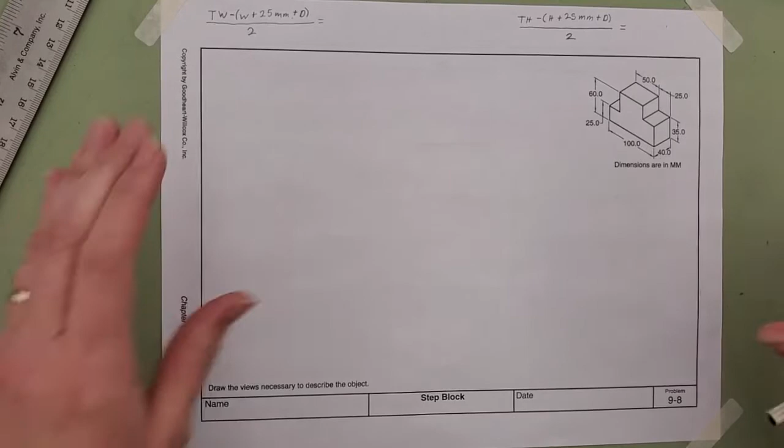So this side of the paper, 9-8, is a little bit different because this has metric measurements. So we can't use our regular scale. We need to use a ruler that has centimeters and millimeters on it.

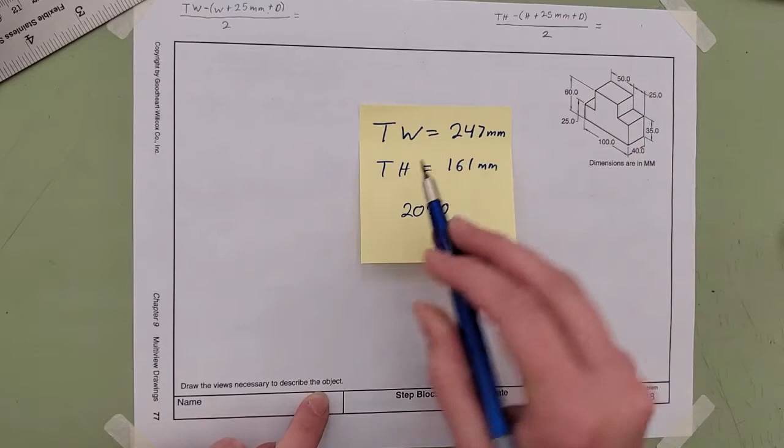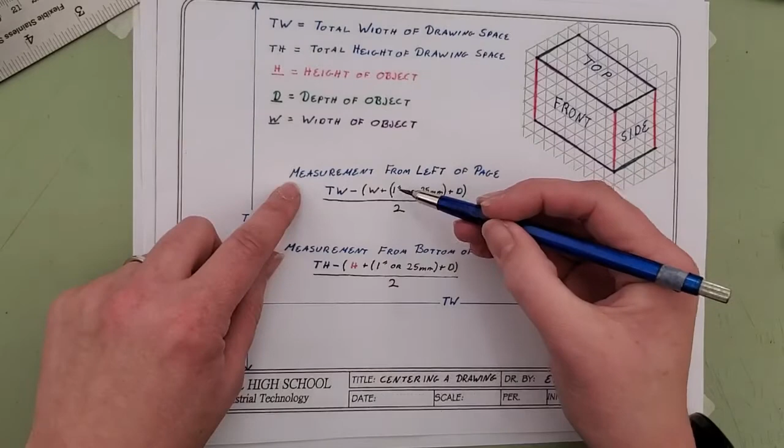So I went over and measured the dimensions from the leftmost border to the rightmost border. My total width is 247 millimeters. From the top of the title block to the top of the drawing space has a total height of 161 millimeters. It's kind of helpful that these two are odd numbers because when we're using metric, instead of 1 inch of space in between, we're going to use 25 millimeters, which is essentially the metric equivalent of 1 inch.

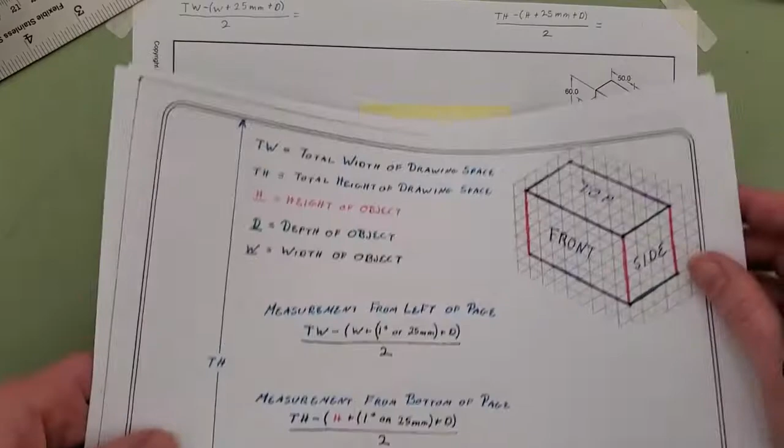Okay, now most of the time when I do my math to figure out where things go, I go ahead and put it on the top portion of my paper. I'm not really grading this for you guys, it just kind of helps me to see where you got a little bit lost. The part that I'm really grading is right here in the middle.

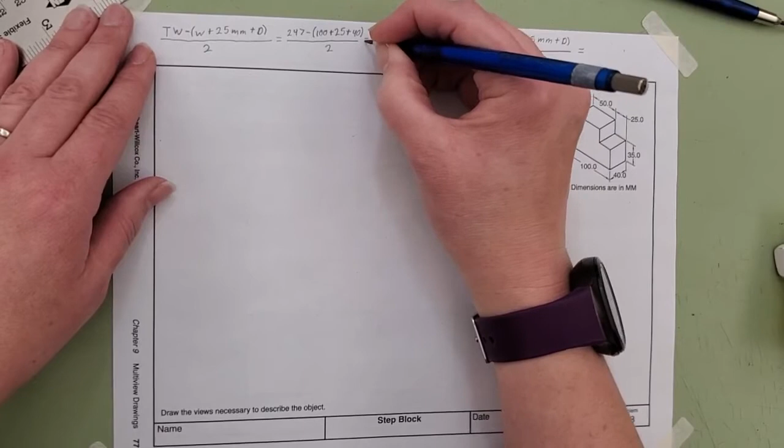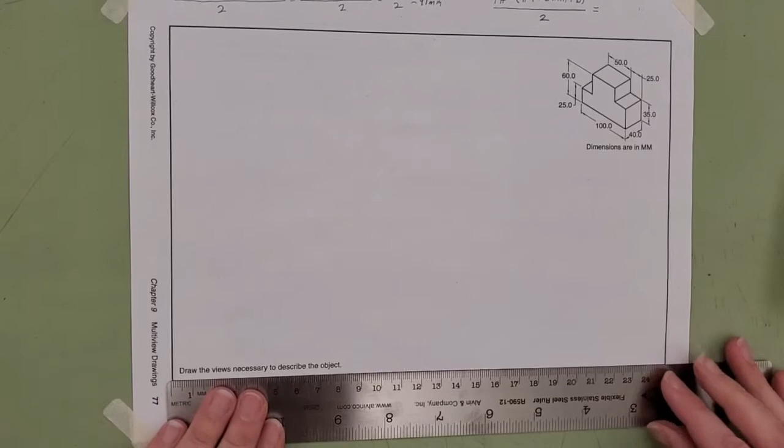So I'm going to figure out how far from the left edge I need to go. I'm going to take my 247 millimeters total width minus the width of my object, which is 100, plus my 25 millimeters in the middle, plus my total depth, which is 40 from front to back. And that gets divided by 2. So when I do that, it ends up being 82 millimeters divided by 2, which equals 41 millimeters from the side.

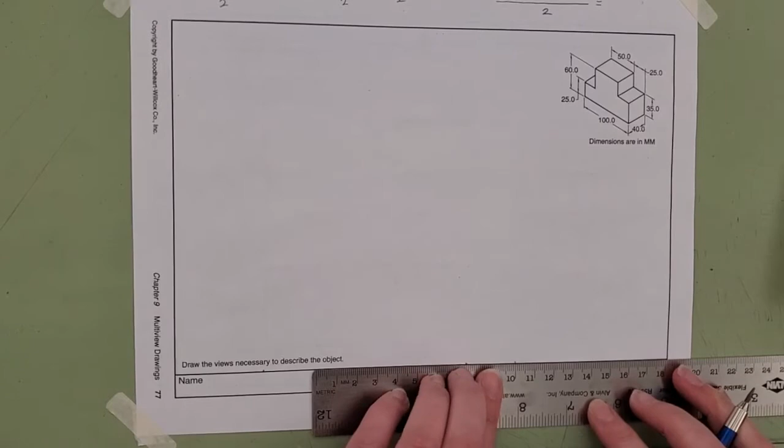Okay, so now down at the bottom of my page, I'm going to scoot this down a little, and measure 41 millimeters, so that's 4 centimeters plus 1 extra little mark. That's 41 millimeters. Then I'm going to scoot my ruler over.

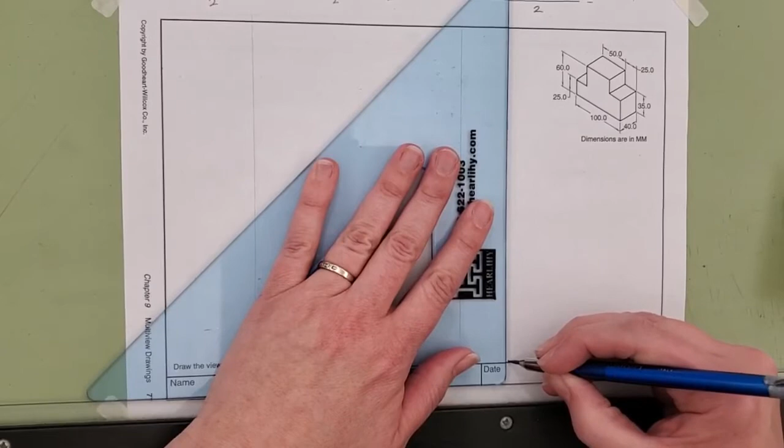100 millimeters equals 10 centimeters, so I'm going to make a mark there. That's a little bit off. There we go. Then 25, so that'd be 12.5 centimeters.

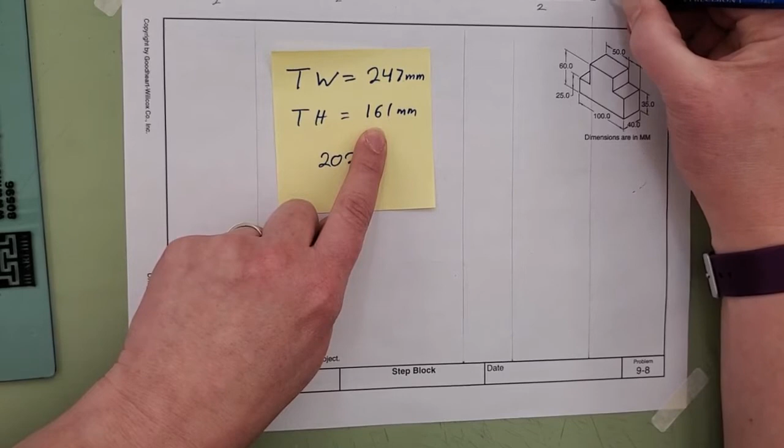Okay, and then this one, I just want to make sure I don't mess it up, so I'm going to fudge it over, and it's going to be plus 4 centimeters because that's 40 millimeters. I'm going to make my mark, and then project those lines all straight up. Remember, we're using our 5H pencil for our construction weight lines.

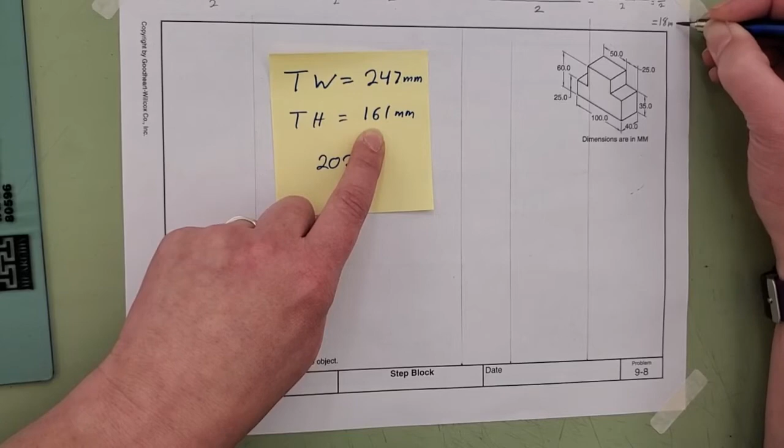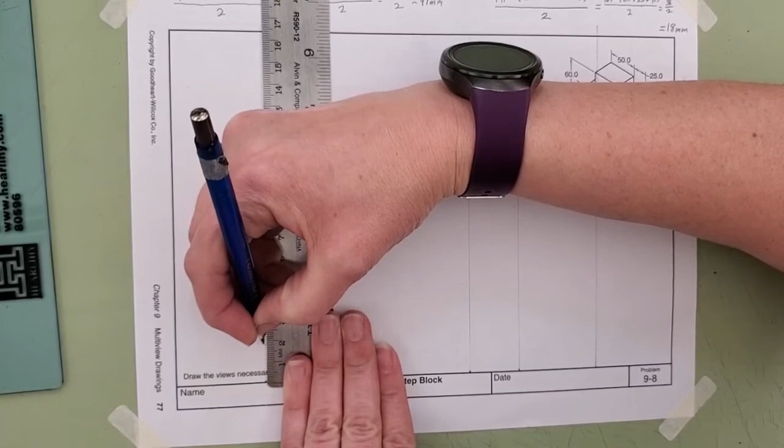Okay, we have all of our width information and our depth laid out. So now for the total height, I'm going to use my measurement of 161 minus my 60 plus 25 millimeters between plus 40 millimeters total depth. Divide that whole situation by 2. So when I take 161 minus 125, that equals 36 millimeters divided by 2, that is going to be 18 millimeters.

Okay, I just realized I did that all off camera, but I showed my math here so that I could see 36 divided by 2, 18 millimeters. So that measurement is going to be our first height measurement from the bottom of my drawing space. I do apologize for bumping that.

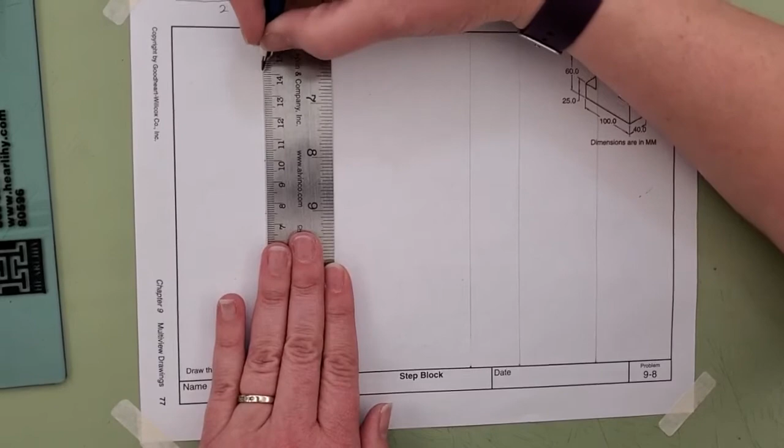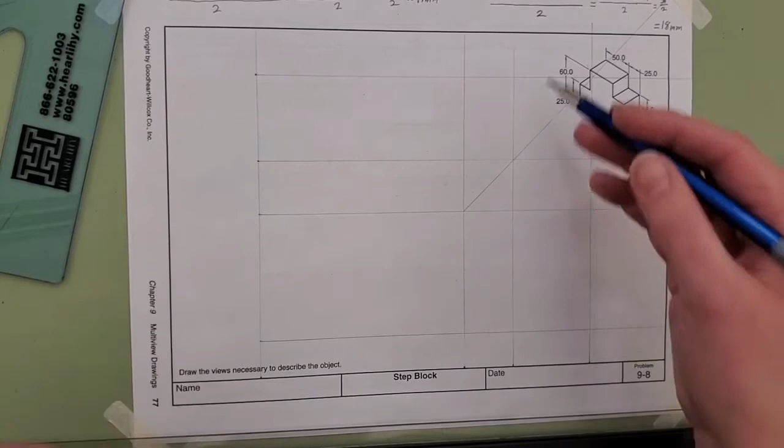So now I'm going to, along this line, my first line that I drew, make a mark at 18 millimeters. I'm going to scoot my ruler up. My height is 60, so I'm going to go to 6 centimeters. Then it's 25 millimeters in between, so it's going to be 8.5.

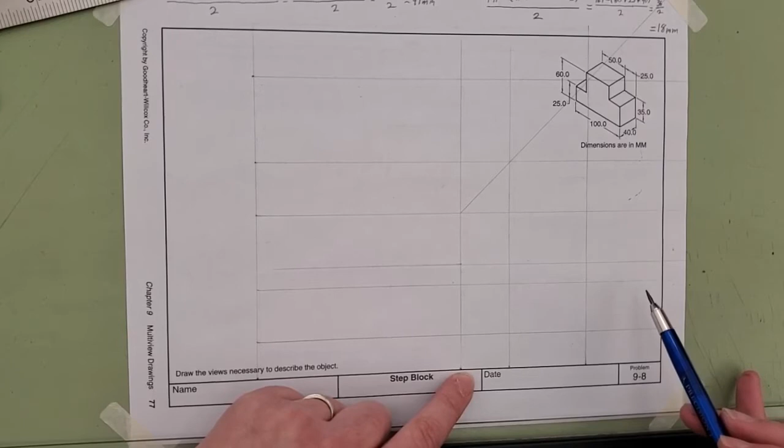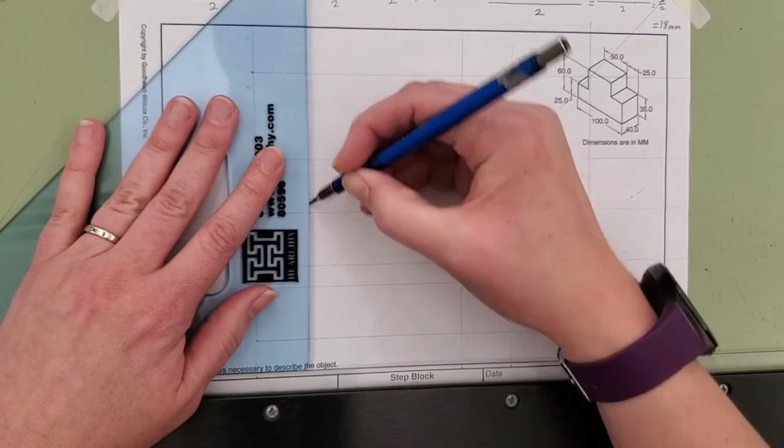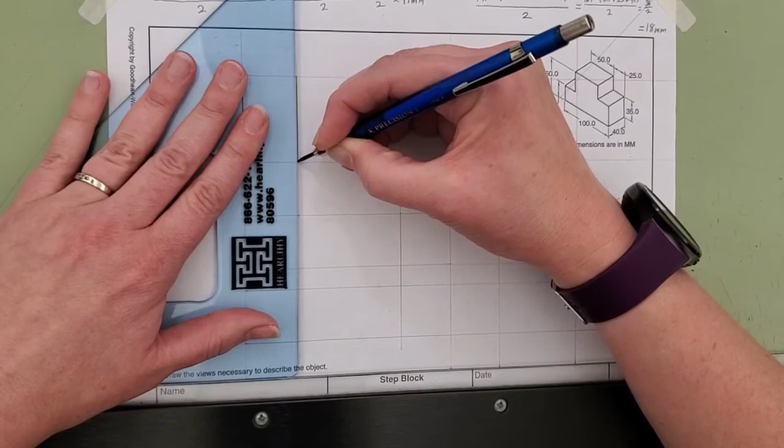Okay, plus 40 millimeters, so I'm going to scoot this down so I can easily measure my 1, 2, 3, 4. At each of those locations, I'm then going to project my geometry over, and from the top right corner of my front view, I'm going to use a 45-degree angle line to connect them. It should be right on the center point for each of those.

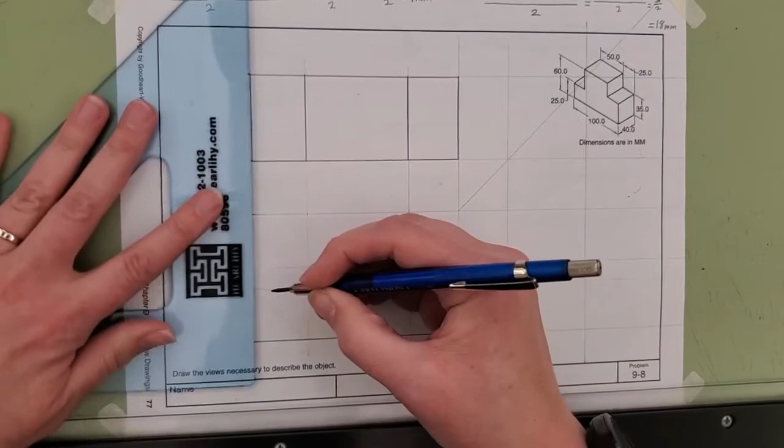So now I have my total height, total width, total depth set up and centered in the middle of my drawing space. Now it's time to put in the details. My front view is going to go right here in the bottom box, and I see a few different height dimensions: 25 millimeters on the left-hand side, 35 millimeters on the right-hand side. So I'm going to make those measurements.

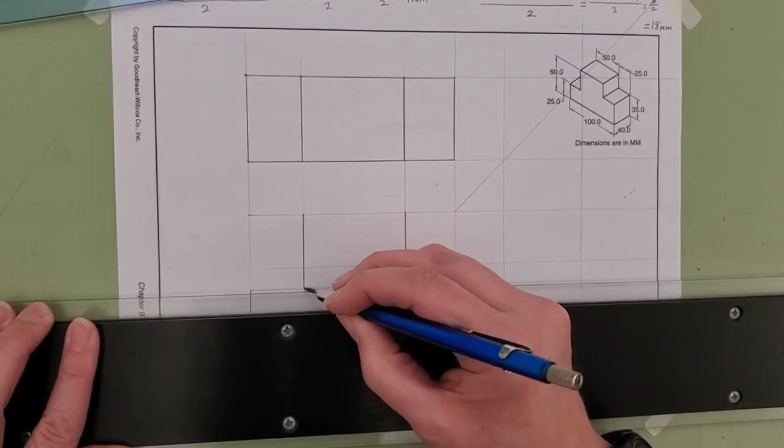I gotta get out of the practice of using inches. So 25 millimeters is 2.5 centimeters. Then a 35. And take the time to square up your ruler, okay? Investing a couple extra seconds right now will save you a lot of time in the long run.

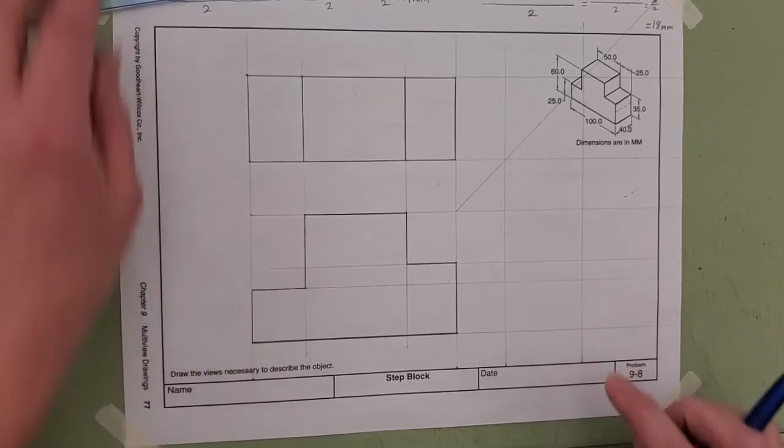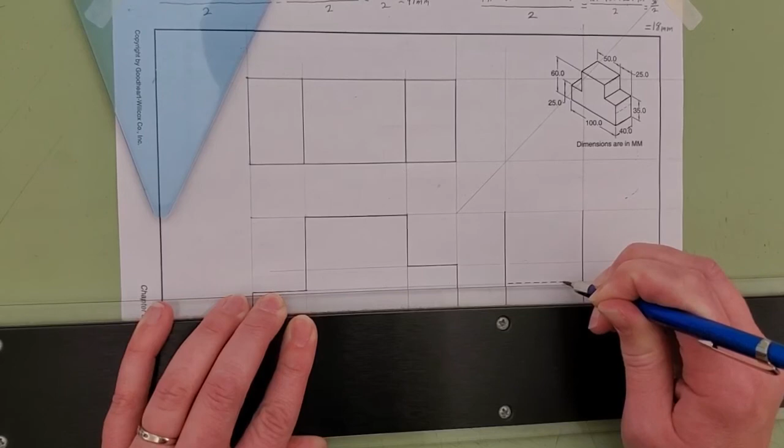So there's all my height information. My depth doesn't change at all from front to back. And so my width information, I'm seeing that there is a 25 from left to right, then 50 millimeters over, and then the rest. So I'm going to do two and a half centimeters. Move it to 5 centimeters, which is 50 millimeters. And then I'm going to transfer those points vertically to both my top view and along my front view.

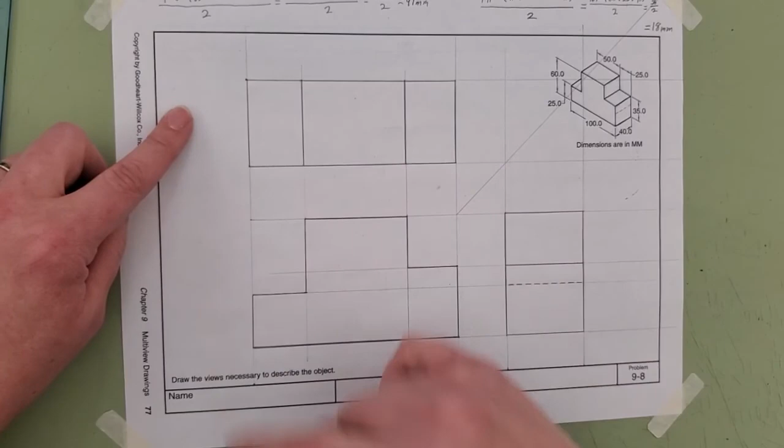I have all my required boundaries shown, so now I can go in and darken my object lines.

With my top view, it was the easiest for me to decide to start with because I can see absolutely everything there and the depth of it doesn't change at all. So I just darkened in my object lines. Now on my front view, that's what I'm going to do next. I'm going to kind of just follow the lines around, keeping in mind that it's taller on the right side than it is on the left side. So I might actually start with the bottom line.